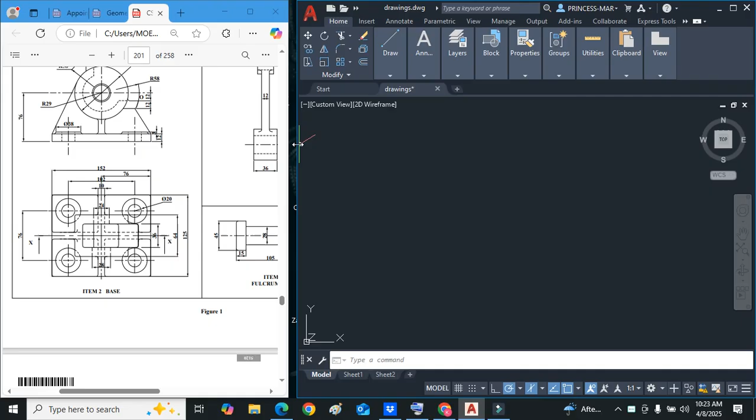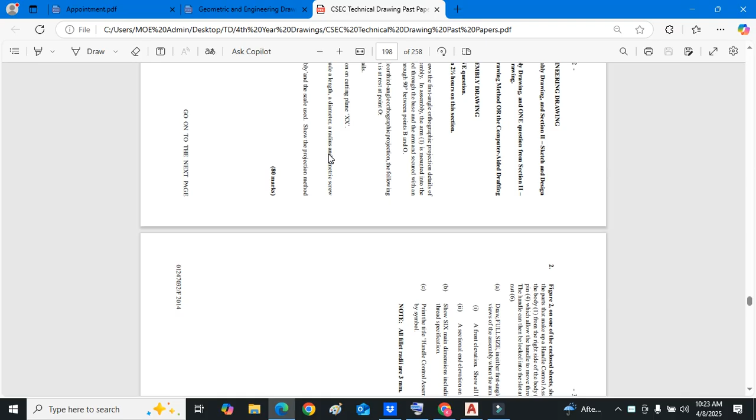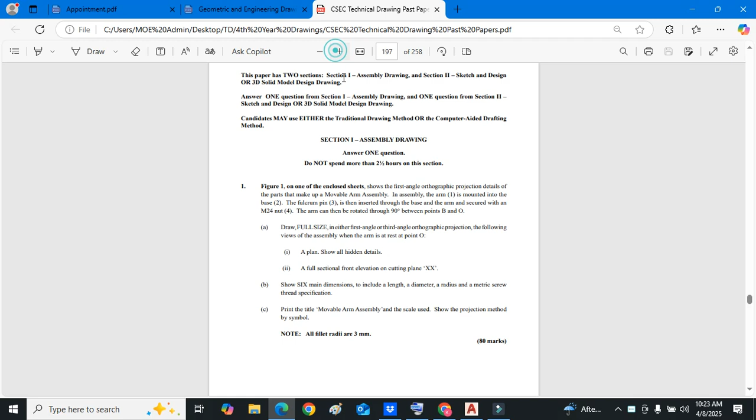We're just going to go through what we did in our first vacation session. So with your exam, here's an example of the exam, a past paper. The front page of the exam usually has instructions here. You have 2 assembly questions. This is the first one, and the 2 write-ups come first. So the first assembly question here is movable arm assembly, and here are the questions.

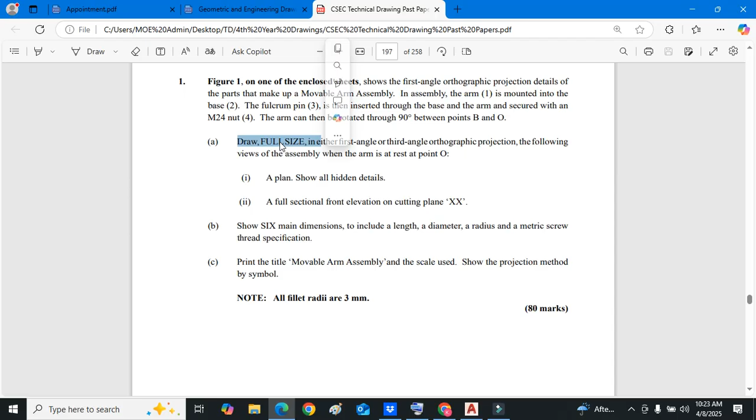It's important for you to understand the questions. Question A, draw full size. So the scale for full size is what? 1:1. So it has a plan, a full section, 6 main dimensions, and they have what to include. Anybody knows what's a metric screw? Have we ever done an M measurement? That's a metric screw. So whenever you put the M12, M16, that is the dimension for a metric screw.

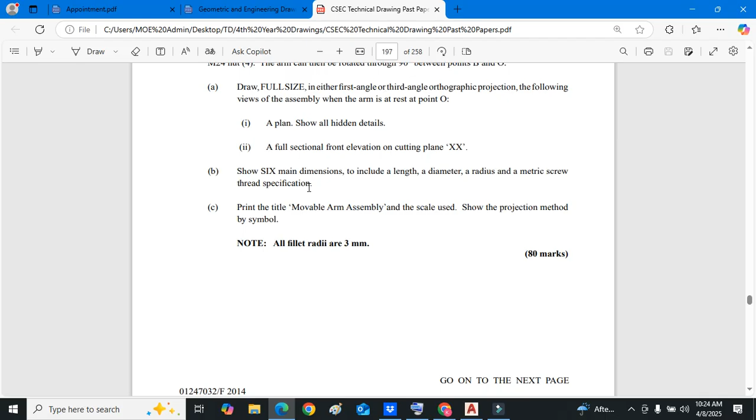Y'all follow what I'm saying? So remember, when you dimension the nuts or the bolts with M12, M16, that is your metric screw. You clear with that? Now, if you do not include these dimensions, you cannot get this 5 marks. Okay? And this is real simple. Printed title, movable arm assembly. The scale was what again? 1:1, and the projection symbol, which we should know. So here's the first one, movable arm.

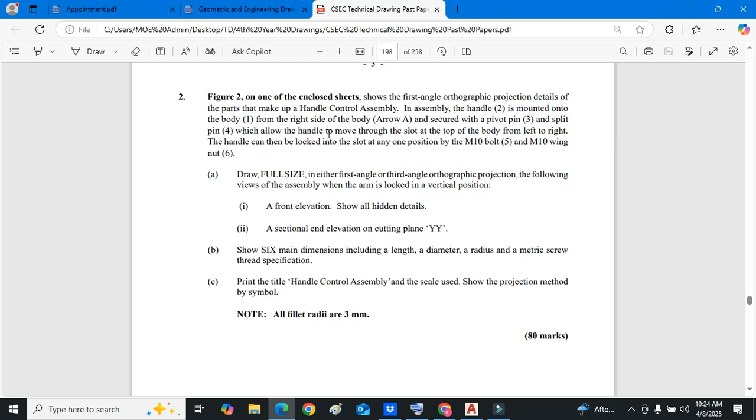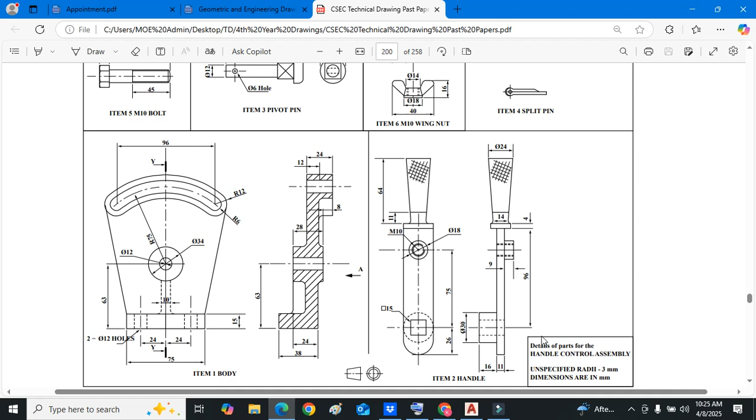The second question is handle control assembly. And now I am skipping section 2 because I'm only focusing on section 1, which is the assembly. So in the exam, they're going to give you these big sheets, and the big sheets will have only drawings. This is the handle control assembly, which is one option. And this is the option that we focus on today, the movable arm assembly.

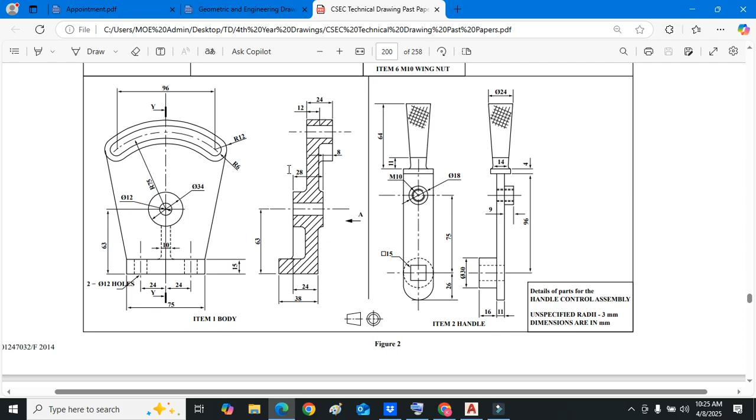So CXC will give you 2 options. One is going to be more difficult than the other. Choose the easier one. Okay? Would you like to do this one? No, we will do this one, but it's not as difficult as it seems. It's the same principle for everything. Alright, so this is the drawing we're doing.

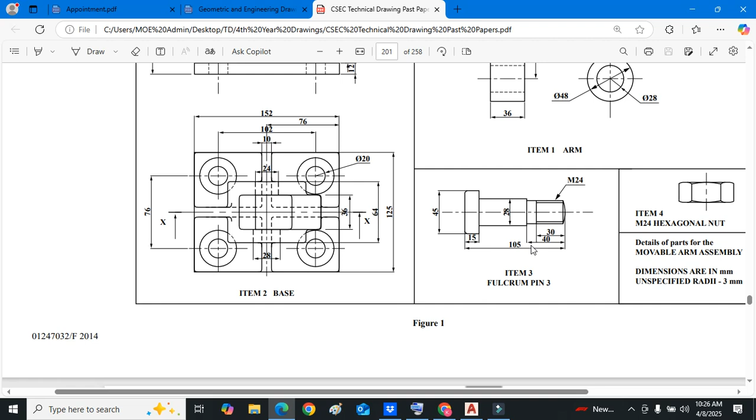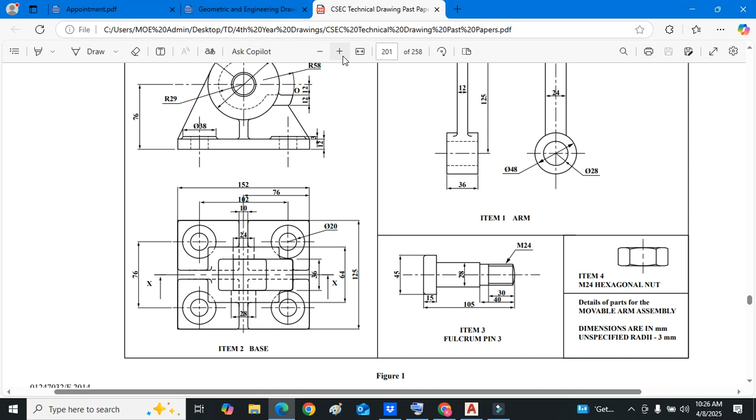Now this pin, it has M24, so it has threads on it, and the purpose of this pin is to do what? What do you think the purpose is? Put inside the arm. So when we look at the arm, does the arm have a M24 or 28 on it? Yeah. See this? So it got diameter 28. Now, something is missing from this paper, because if this fulcrum pin is a circle, then this dimension here should be diameter 28. You follow me? But we're assuming that it's diameter 28.

We have the hexagonal nut. What's the purpose of the nut? To hold the M24. You understand? Now, here's the funny thing. Remember, we spoke about the 6 dimensions, right? You just need to put back this dimension, and that's your metric screw. You looking at the board, Safri? You see that? You ain't creating dimensions, you know. You put back dimensions. So you literally put this back. When you assemble the figure, put it back the same way.

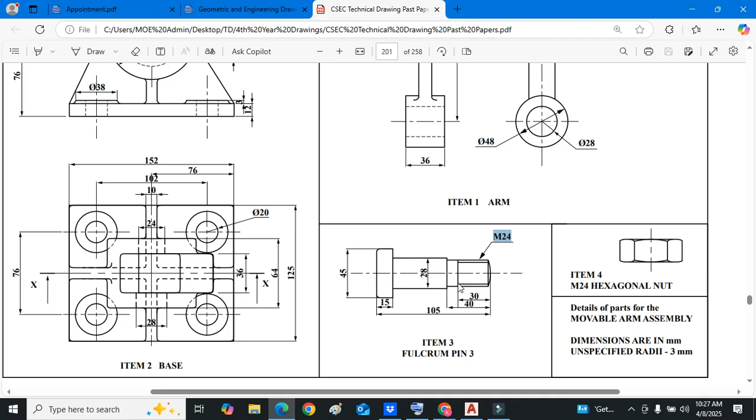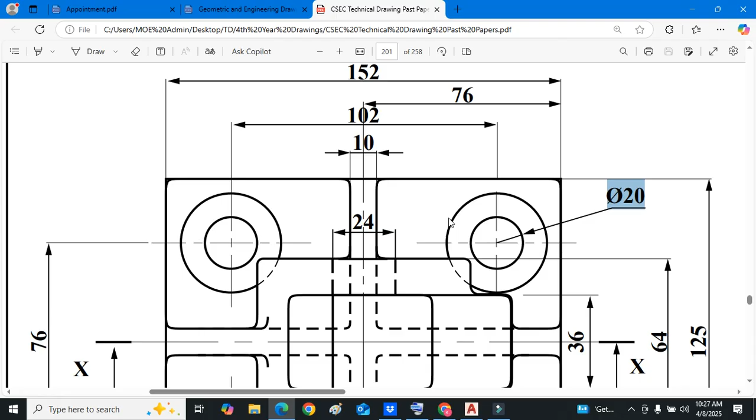It says a radius or a diameter. Put back this diameter 20 the same way. The same exact way it is. Well, this way is wrong, but I'll tell you why it's wrong. This drawing, even though it's a CXC drawing, has several errors on it. You will lose a mark if you leave this line in here. You understand that? So when you put back diameter 20, the diameter 20 with the arrow is correct. You would use that line to make the 20. Alright, so for the sake of the video, I'll speed up.

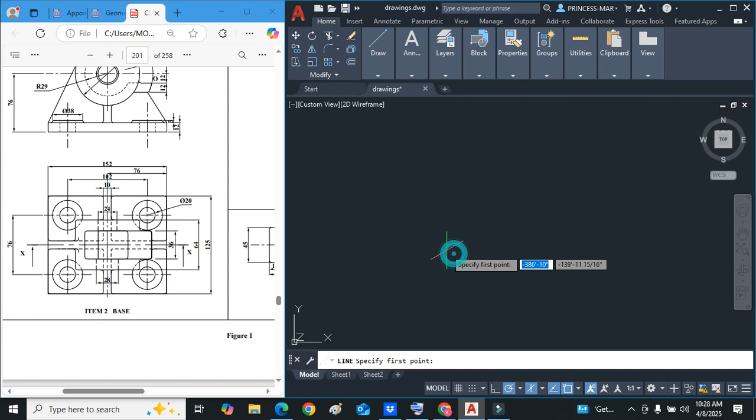Alright, so by now, which one of these parts are you drawing first? The bottom? Which part is that? The bottom of the fulcrum pin? Plan view of what? The base, okay? So, there are a few ways we could start the plan view. I'm gonna start with the center. Now, if you're good at math, the center is a good way to start, because you just need to divide each of these measurements by half. If you're not good at math, you can do it differently. But I am at the center, so the measurement here is 152. What's half of 152?

76. So 76 to the left, 76 to the right. Now some persons had issues with these measurements, and this will cause you to lose marks in the exam because you'll work slowly. So you got the 152. Now let me show you something that the boys did last year, which was a very dirty habit. So if you don't know how to divide and the measurement is a little funny, you draw the 152. And what do you think you do next with it? You put it in the middle.

So the class that I had last year did this and it shocked me. So anyhow, you move it from the middle, and once you put it here, you could change the layer, but that's 152. You understand that? I'm gonna change the layer of it, probably put it as red. So in this way, you don't really have to measure or divide. You understand what they did, Keontae? So what they did was they drew the measurement across.

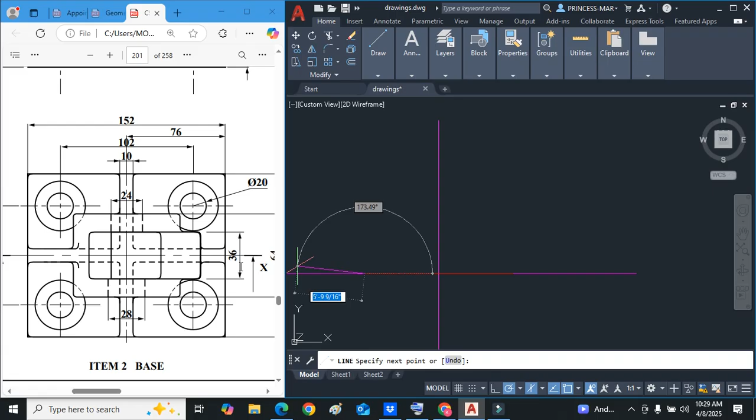Sorry about that. All right, so we have our 152 in. Now we have a 125 going up. I'm gonna do the same thing again. So we draw our 125 going down here. And as I said, what they did was they drew the line, changed the layer, and they just moved it from the middle over here. And then they just drew in the rest of the figure. So they did not do any type of division or anything like that. And the funny thing is the measurement still came back correct.

So as I said, if you have problems with the dividing, you can try it that way. But it's obviously something you gotta practice. So I'm just gonna check the measurements after. So we have here our 125, and then we have our 152. What do you think about that method? Seems much easier. You're just gonna make sure you get it right. If you get it wrong, it can be issues.

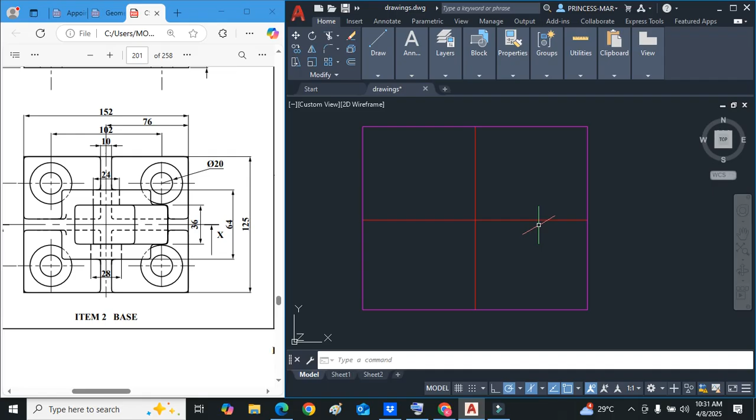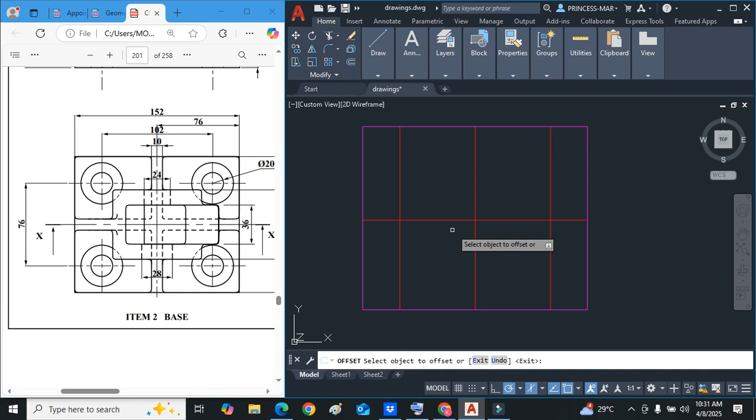All right, so the 102 over here, which is the center, was half of 102. 51, so we offset 51 to the left, 51 to the right. And then the center of those circles is 76. What's half of 76? 38. So we offset our 38 up and our 38 down. I'm gonna draw the small circle here, diameter 20. So Keontae, if it has a diameter 20, pay attention people. You just click the diameter, draw it at 20. So let me just do that again. We come here, diameter, specify the center, and because I set it at 20 it's correct.

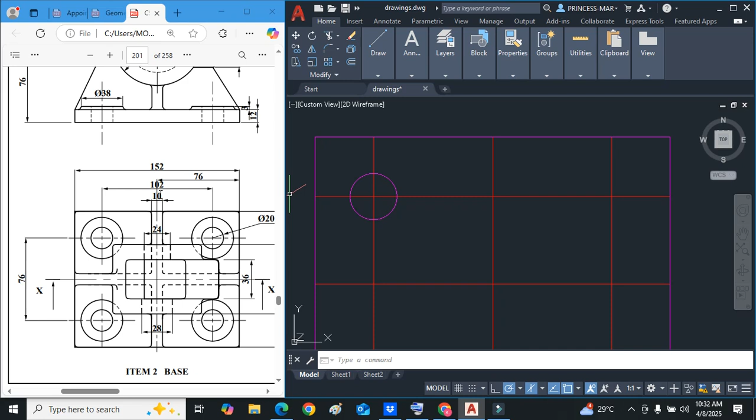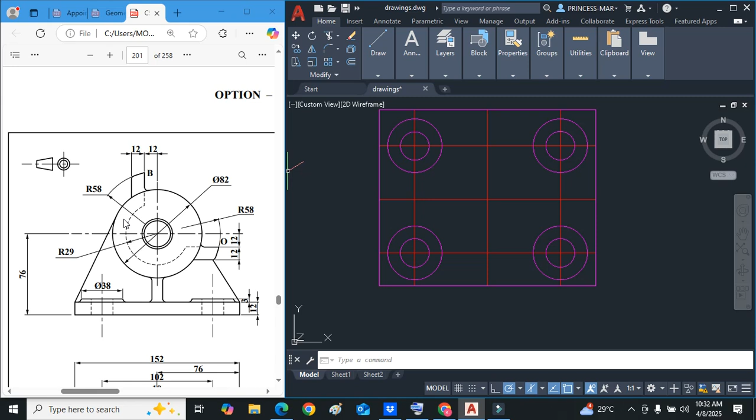So over here we have diameter 38. I don't even have to divide that. I can just do it diameter 38. We copy the 4 across. Now my problem with some of you is that you took really long to do this and you lost marks. So I started with the plan. I'm gonna start here with the plan view. When we started the session today, what did we discuss doing first? C. Question C. So we go back out here to question C.

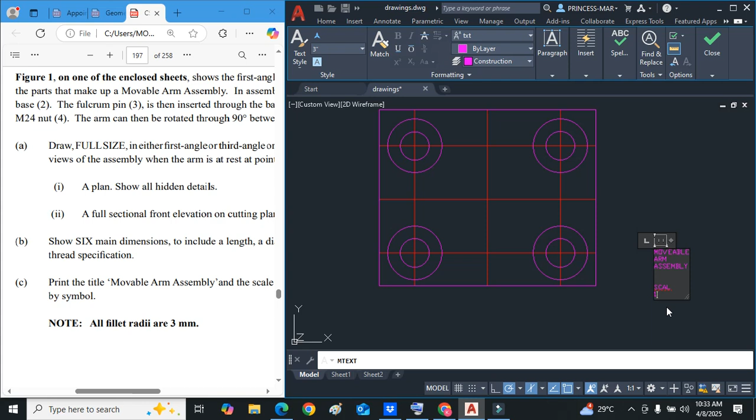The problem that most students have with this exam is that they leave out questions B and C. Print the title movable arm assembly. So I'm just going to stop to do that to get my 5 marks. It then says to do the scale 1 to 1. Now, you should use a colon, but my shift is not working. So just make sure you use your colon in between the two. And then it has the symbol. So I'll draw the symbol.

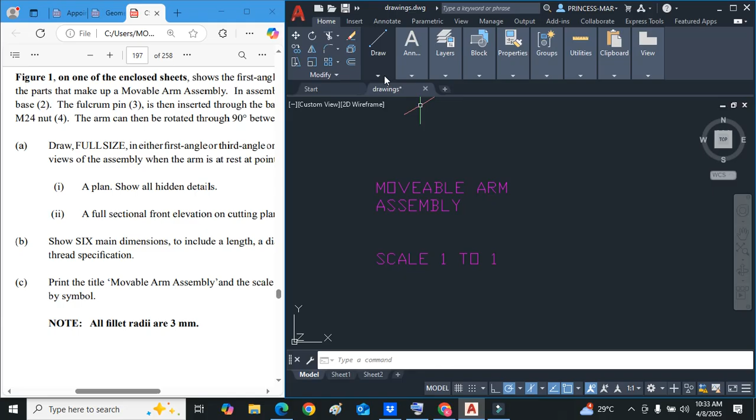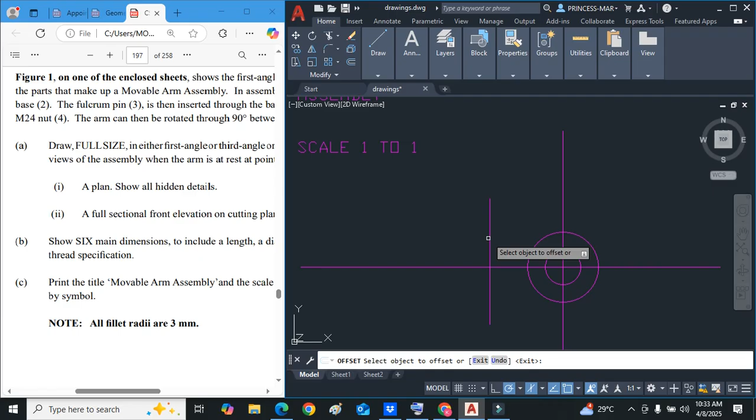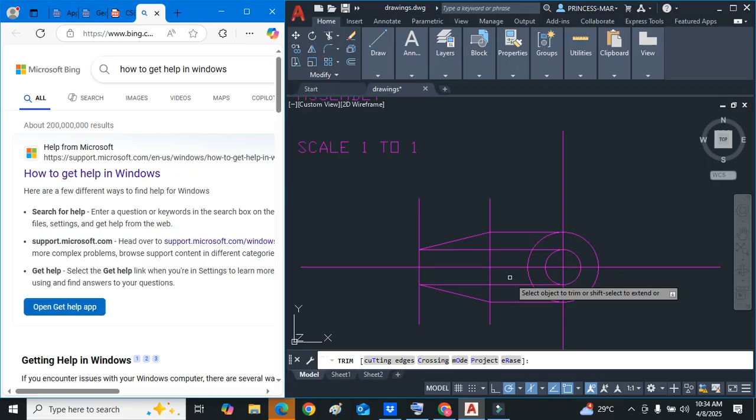Now by now each of you should know the measurements of the symbol. Radius 5. And then there's a radius 10. We draw a horizontal line, a vertical line over here. Offset it 20. And this is our symbol. Now for each drawing you must do the symbol, so please get into the habit of practicing it and doing it now so that you know how to get it done.

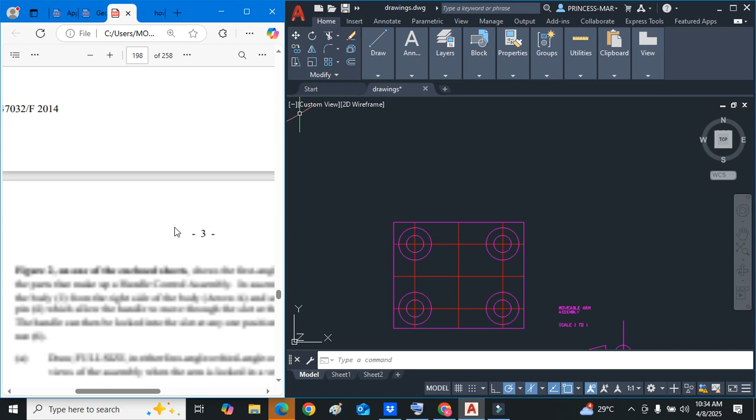Any questions or any comments about anything I've done so far? Alright, so I made sure I got my marks. Any questions about that? Who has not done this? Yeah, so the exam practically finished and you've lost those marks. Okay, so we go back down to drawing. I'm not going to do all, just trying to do a bit of it to give you an idea of how it will be done.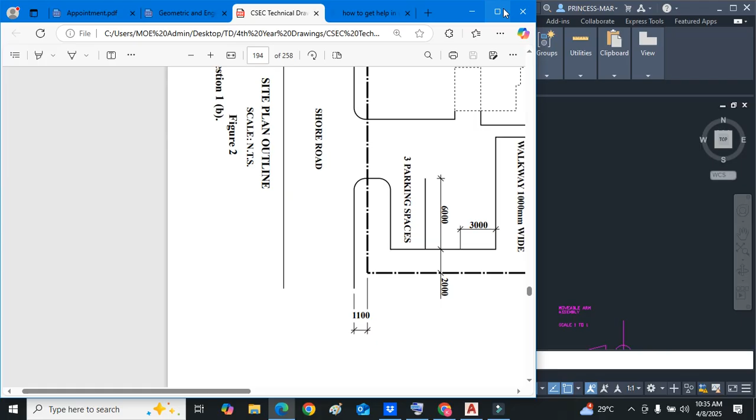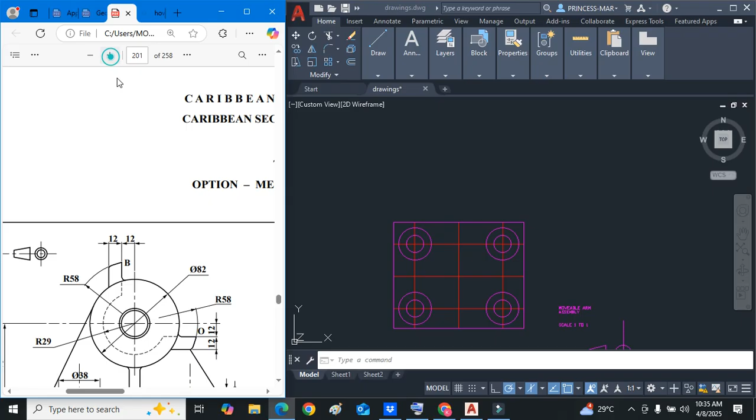Alright, so going into the front view. Now, some persons had some problems with the front view. I will repeat this up until the exam. Do not draw your front somewhere over here. Project upwards to make your front. So you could just project a small measurement. We're using AutoCAD, so there's no real space that would be a problem. Just come up vertically, draw your horizontal line, and then let's start the front view. You understand that, DeMarco? I do not want to see you drawing the front view in a position that is not lined up with the plan view.

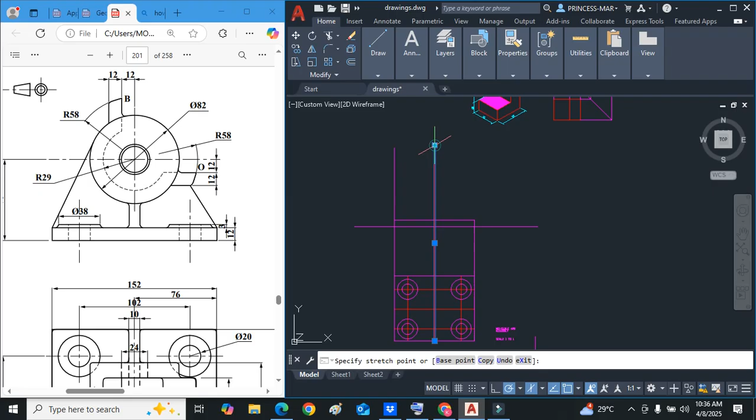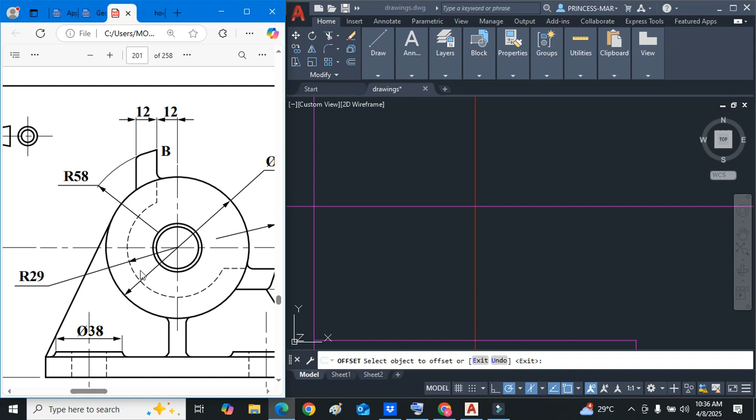Alright, so now I put in that baseline already. So we are coming up here 76. 76 from the bottom. And these circles give a few persons problems. So we're going to start with the smallest one. Question. The measurement for the smallest circle is shown out here? No. No. If you look at the arrow, it tells you which circle we're looking at. This arrow is looking at the biggest circle. You understand? So the biggest circle here is diameter 82. Tell me what's the measurement of this circle?

Radius 2. You see the arrow? See the arrow there? The arrow touching the circle. Is there any arrow touching the two of these circles? No. So the measurement in here, you could look and you could look. The measurement is not up here. The measurement is down here.

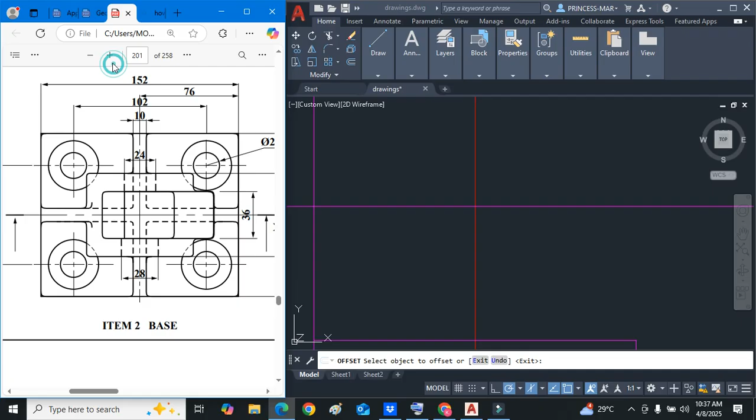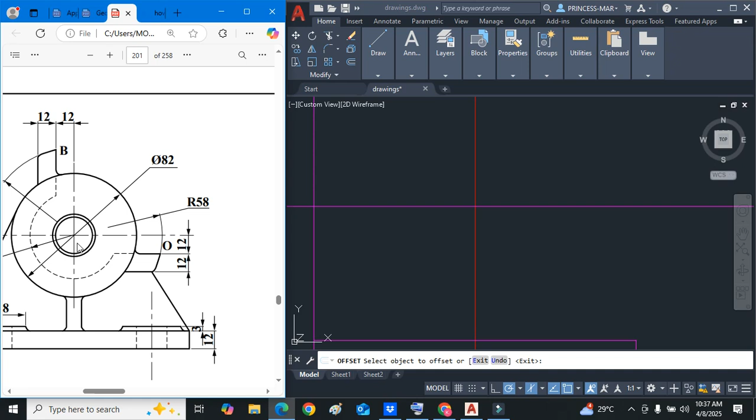Right? And as I tell you, there's an error in how this paper was done because this 28 is a circle. You understand? So this should have what by it? A radius or diameter. You understand? So this 28 and this 24, those are the two circles. So the paper kind of made it a little more difficult for you because it did not put on the radius. But these two circles are diameter 28, diameter 24.

We understand how we're going measurement? So we come here, circle diameter, diameter 24. We come again, circle diameter, diameter 28. Now we go into those bigger circles. There's a diameter 82, and we realize that diameter 82 is what uses the tangent. So you can draw a slanted line now. So your slanted line comes from here, run across the surface, find the tangent.

If the tangent is not coming up, remember I'm making a video so I'm explaining everything. Go into drafting settings, come over here, make sure all of these are on, tangent is here, make sure all of these are on, that's it. Now, the right side is different, right? So how do I get this done?

Drawing 58 first? We're drawing this first. Draw that, and then we can get into 58, and that 12, two 12s. I think we can use the two 12s. Alright, so we offset in, offset 12 down. And then we do another 12, so that's the top line, this is the bottom line. And now we're doing radius 58. Radius 58.

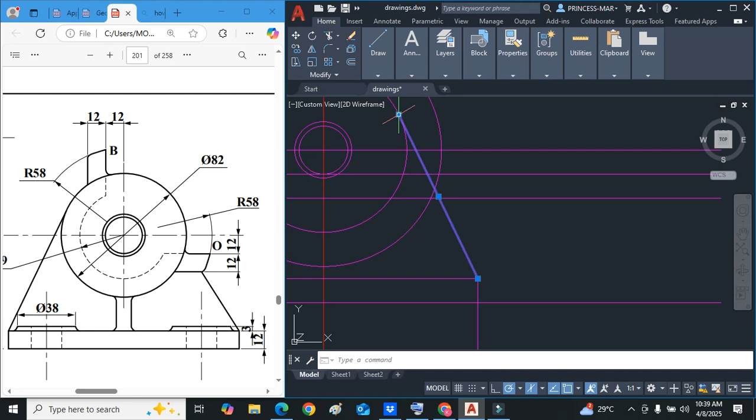58, should that hit the 12? I know, that making sense. Because if it is radius 58, those two 12s should hit it. Anyhow. Well, what I can do is I can adjust this. Because what they probably want is for this line to come here. Y'all think so? Alright. So we trim that, we trim this, trim that, and we trim that piece too. I think everything else here should be trimmed.

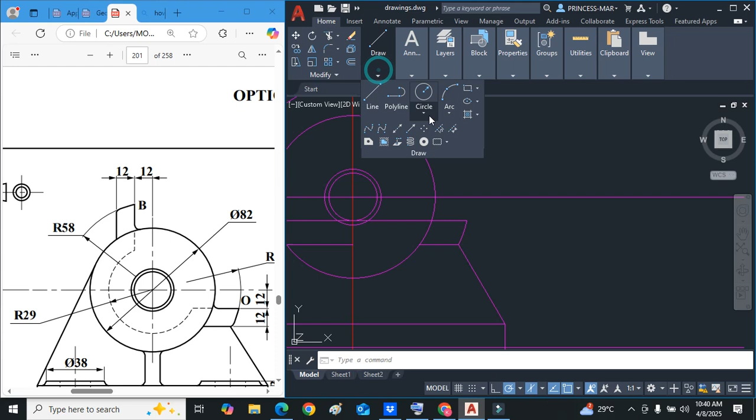Alright, so the inner circle was the size of this circle. This hidden detail one. 29, good. So radius 29. And that radius 29 comes here, and that's the inside piece. Now, we cut in this figure, right? Yeah. See cutting plane over here? XX. So I ain't waiting. I'm cutting it one time.

So this hidden detail that's in here, pay attention. This hidden detail that's in here is going to be solid. You understand? So this 58, I can leave that as solid. We can see that, that's going to come across here. Solid again, solid. We are missing this measurement now. So I'm just going to delete some of these.

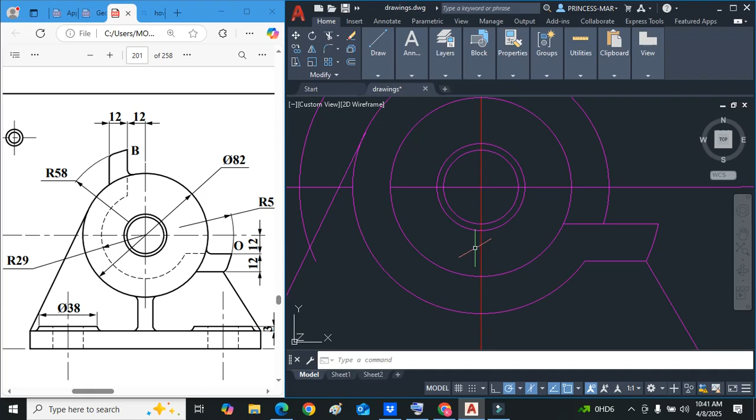The web is still going to be here when this is cut. Where's the web? Down here, it comes straight across. So the way they have the web done, do they have measurements for the web? The web is 10, so I will offset this web. Offset 5 to the left and 5 to the right. And I'm going to put in the web.

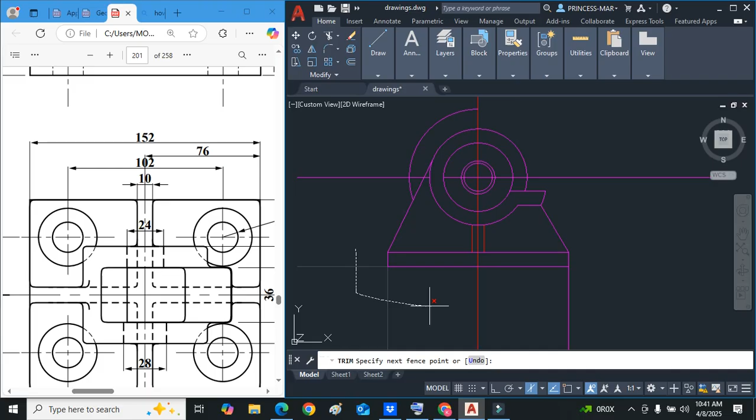Now remember, we do not section webs, we do not section parts that have threads. We do not section fasteners, which are nuts and screws. Alright, so how many persons got this far? Okay, that's pretty good. Alright, so we go back up.

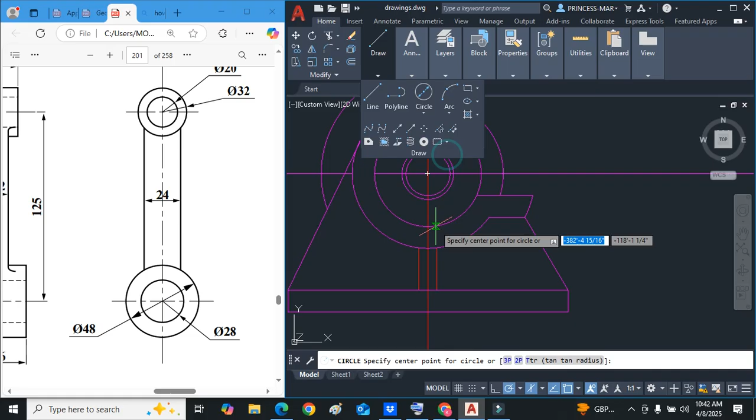Now, I think I'm going to stop here, and I'm going to start to assemble. So the question said that this piece must be positioned at O. So I'm going to change my layer just so we can see a different piece coming in. And diameter 48, diameter 28. I think we have diameter 28 already. I'm just going to do it over here. And then we have our diameter 48.

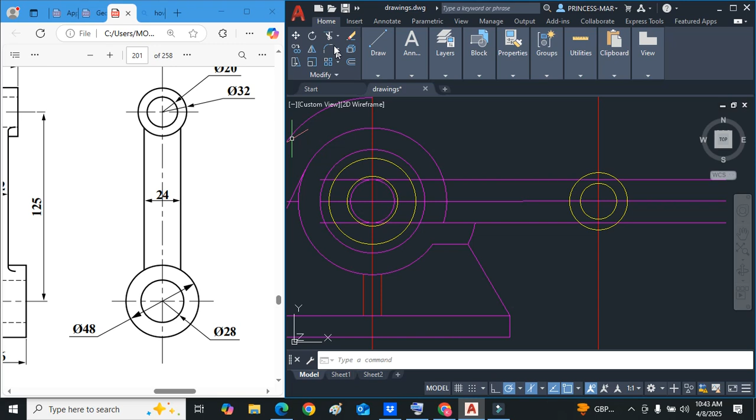So, and I will draw across now. This is 125 coming across. And I'll do the two smaller circles. Over here is diameter 32. And we also have here a diameter 20. Then we have an offset for the 24, 12. 12 down, 12 up. Anybody's lost on this piece that I just drew? Hmm? Okay, good.

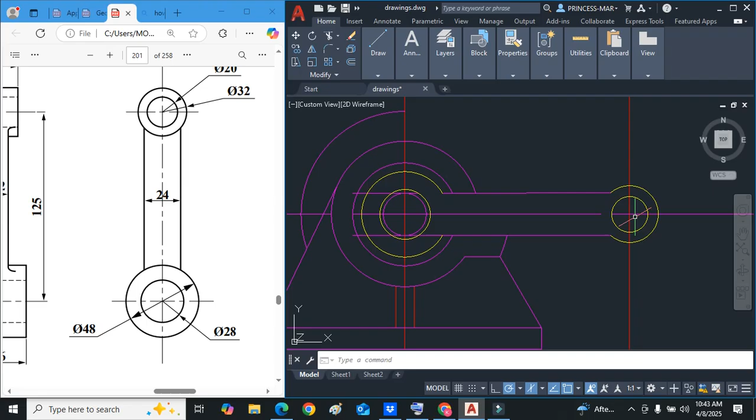And as I said before, I'm going to section it one time. You do not have a lot of time in the exam to do one piece here, do one piece there. So it makes sense to do your pieces together if you understand them. If you don't understand them, you could draw them separately and then just drag them in.

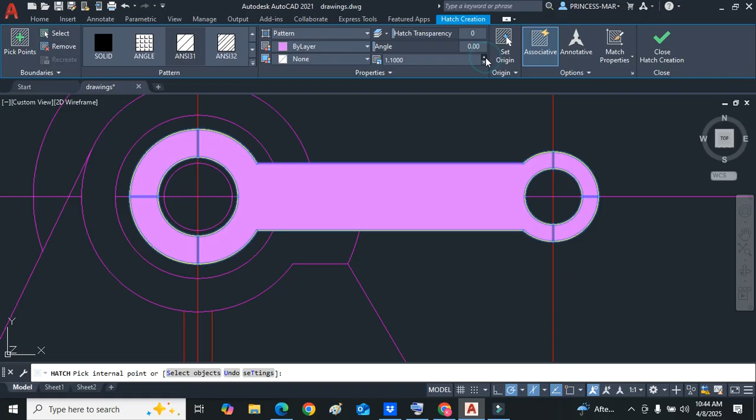So over here, you're just gonna hatch. Remember to change your layer to section first before you hatch. It should be on ANSI 31, and we just make it a little bigger to see the lines. Alright, so that is that for that piece. And now I'm also going to hatch this second piece here.

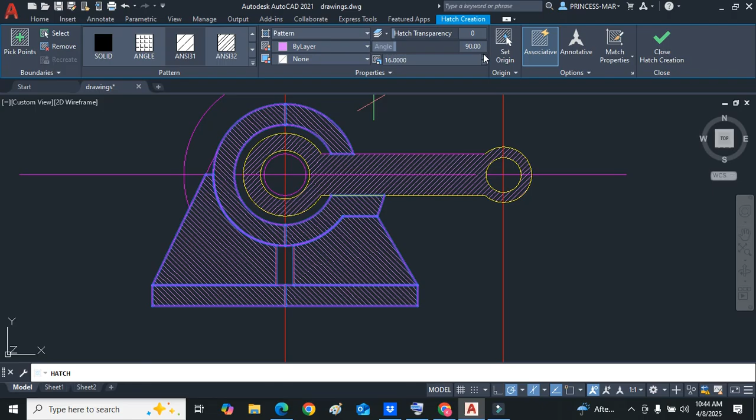Now I'm not checking to see if this second piece is correct. I'm just hatching it so that we can see the difference between the two. Because the second piece is different, I have made the section lines a different angle, put them at 90, and I put them the opposite direction. You understand that so far? This section is not correct, it's not finished. I'm just doing it so you get an idea of it.

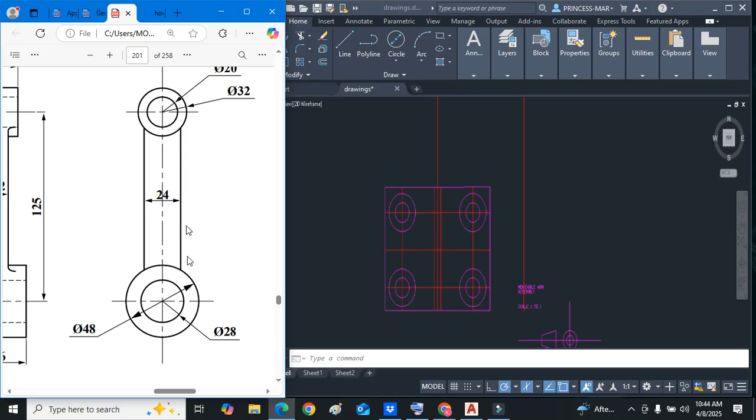Alright, what's missing from this plan view? You're missing this piece here. So when we come in now, I need to draw in that piece. Well, I don't need to measure, I'll just project these down. 1045. So I'm just gonna project these down because it should line up. DeMarco, you understand what I'm doing? So I'm making sure that the pieces that I have line up with one another.

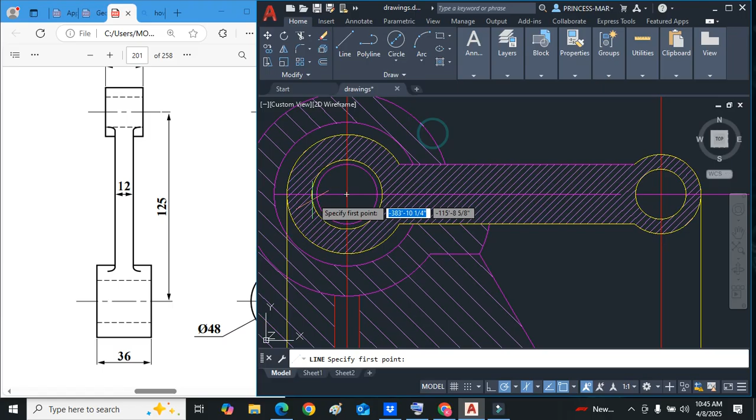Remember the question asks us to show all hidden detail in the plan view. Alright, so this being said, project this across and make this a center line. And now I'll use that to finish this. Offset, what's half of 36? 18. Half of 12. Alright, so we have our 36 here. The 36 comes down into our 12.

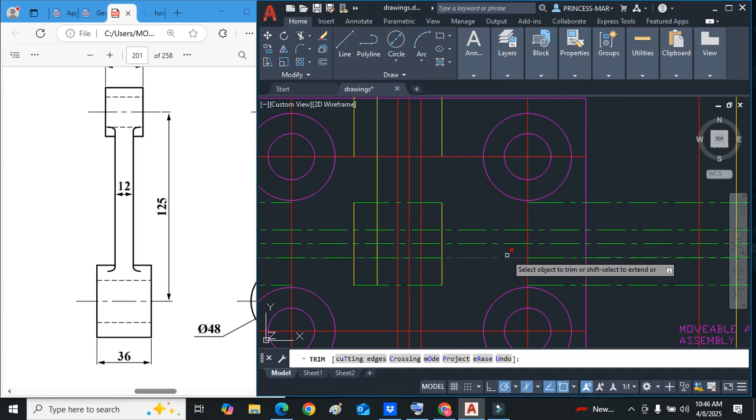And then we should have the second circle over here, which is 25. What do you think I'm extending this for? So we could project down. So the offset, half of 25 is what? So this is the plan view of the arm that we put inside. 12.5. Let me just check to make sure that measurement is correct.

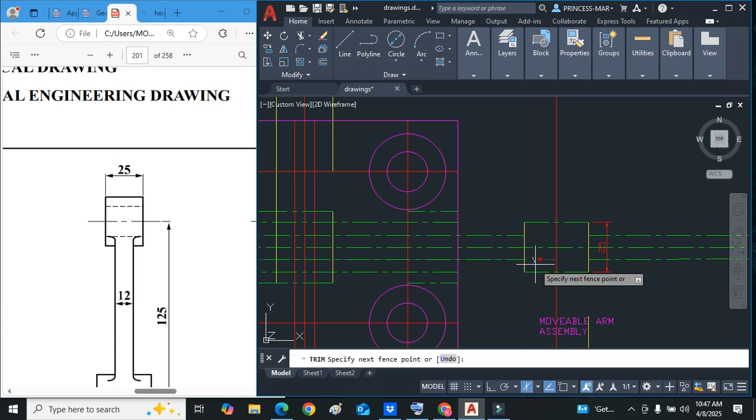Center line. Alright, so that is it. And now we dimension. So we have our 25. Any questions, any comments? Are you beginning to understand how I'm doing it? Now, at the end of it, it does not make sense us talking about this. What you have to do is make sure that you have the drawing done, that most of yours is completed. Because with this, the only way you're going to get the marks is if the drawing is done.

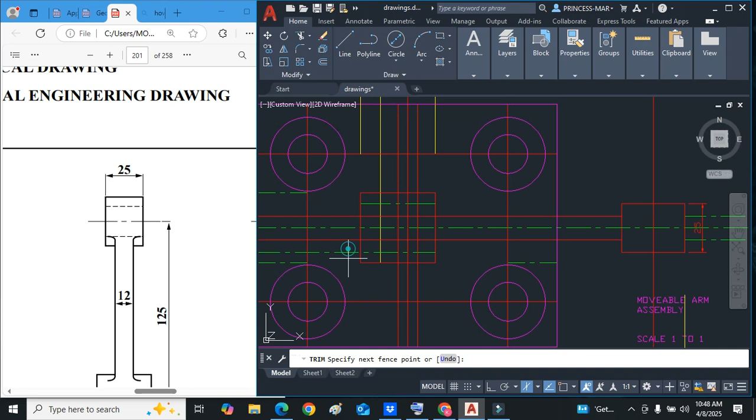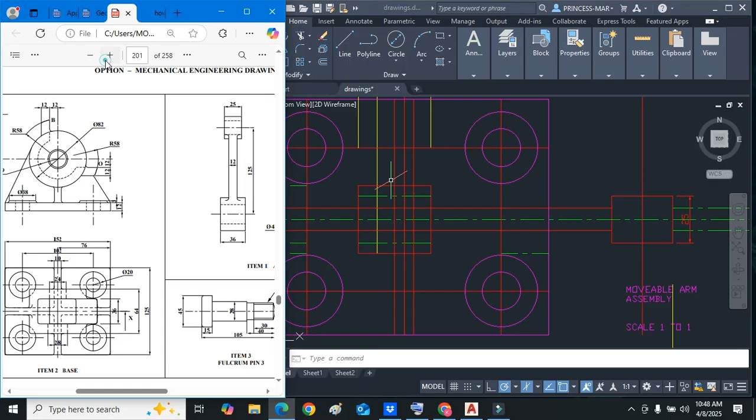Alright, so I'm gonna stop there with that piece for now, and I don't think I'm gonna do much more. Where's the fulcrum pin? The fulcrum pin is going to be placed in here. So if you look at this pin, it's going to be turned in here and pushed through this part. I did not draw this C part that's here. You follow me? So the fulcrum pin is going actually in this space, and then the nut is going to be on top of it.

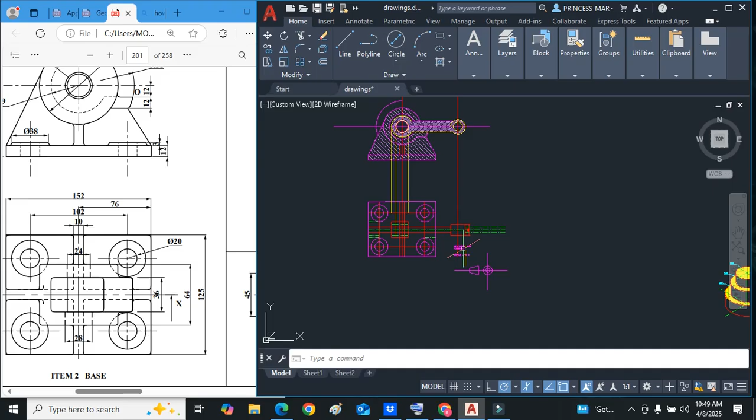Alright, the reason that I am not going to finish it is because this is what you're going to complete for Thursday. I have given you an idea of what it looks like, an idea of some of it. So we did the label, we did the scale, we also did the symbol. What is missing? I'm missing the dimensions, and I'm missing the cutting plane. So I'm going to do the cutting plane now.

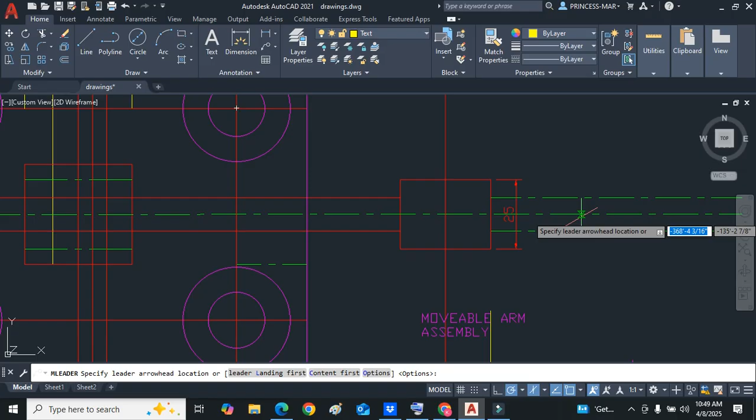Now generally for the cutting plane, you just select your leader, come down here. So this is A, and I'm going to do the same thing over this side. Just come down, left click, A. So that is how you do your cutting plane. It's not perfect, the two of them should line up, but you understand how I did it? Now, next thing here is the labels. So this piece here is sectional front view on plane AA, and then we shall have our plan view at the bottom.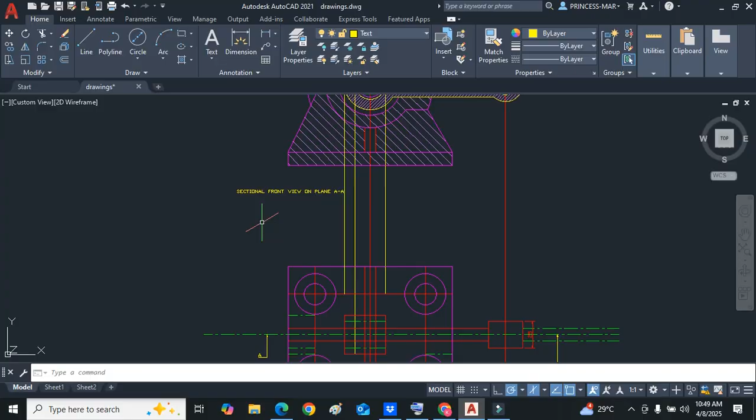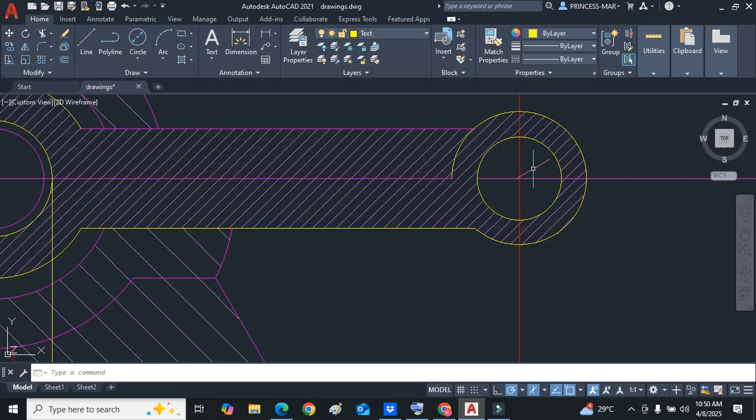Alright, what is the thing that I'm missing the most on this drawing? What's the thing that's blatantly incorrect? This line is supposed to be this type. So all of my layers here need to change. Okay? Outline should be outline, center lines should be center lines, and of course we said it needs to be finished. Any questions? You understand it to some degree? Yes, sir. You sure? Yes, sir.

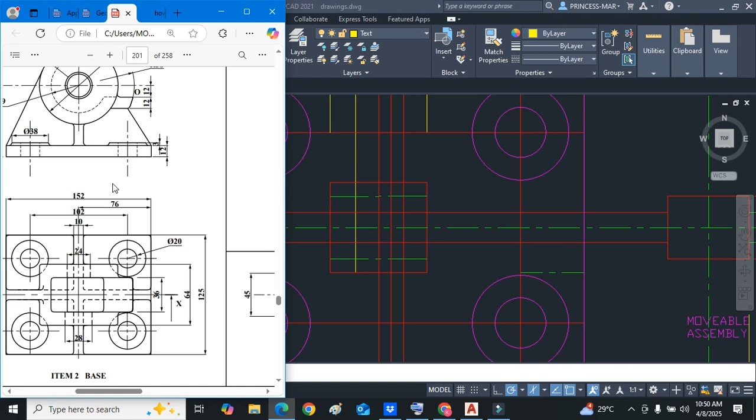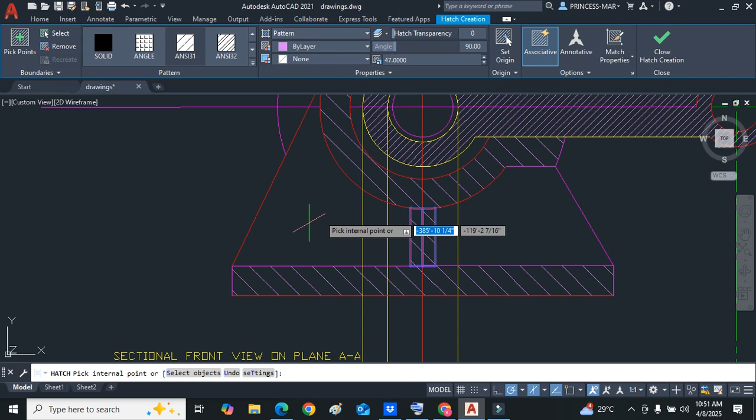I think that part is a web, no? Yeah, this piece here will not be sectioned. So I'm giving you a tip for homework. This triangular piece will not be sectioned because that is actually a web. So you will have to leave out this piece. It's only the bottom, and then it's only in here that would be sectioned. You understand why I left that out? And here's the reason why I left it out and why I left the middle in.

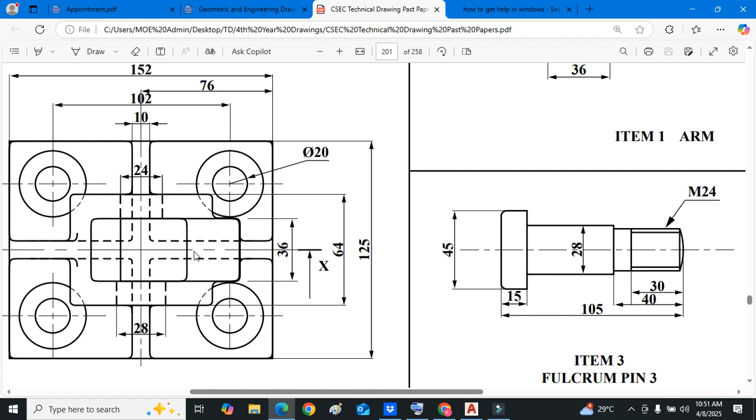This piece that is coming up and this small piece are all supports of the figure. And you can see the supports here. There's one support right here. There's another support here, a web. There's one here and there's one here. You understand that? Now when it cuts straight through the center it is only a solid piece. So that's the reason why I section this piece instead of leaving it, right?

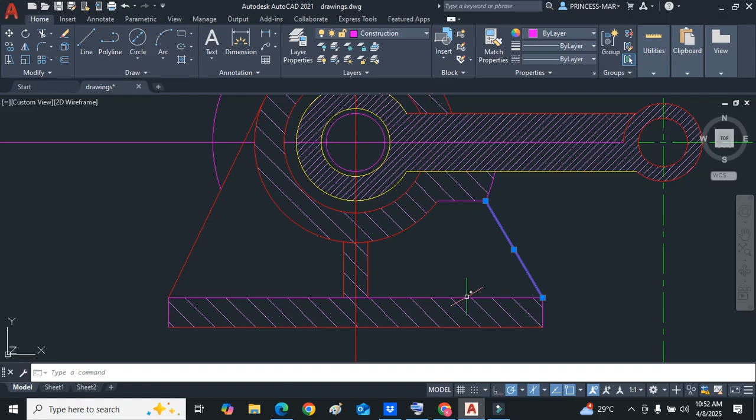But there's some persons that would leave this part unsectioned. But that's the reason that I did not section the left space or the right space. You understand that? The point that I'm making is you don't section webs. So do not section your webs. Final comments before we end the video. We have the sectional front view. We will have our labels, and make sure you have your center lines. Keontae, you understand this a little more? The only thing that you can do to really understand it is to draw it. So at this point, I'll stop the video here.